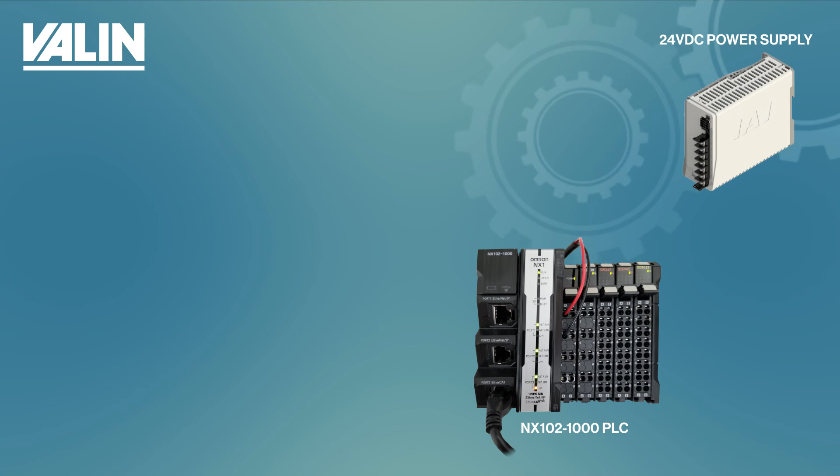Let's get started. So here's the hardware layout that we have. We have the NX102 here. We have the power supply to power up the NX102 PLC and also the MCON controller. And also here's the couple actuators.

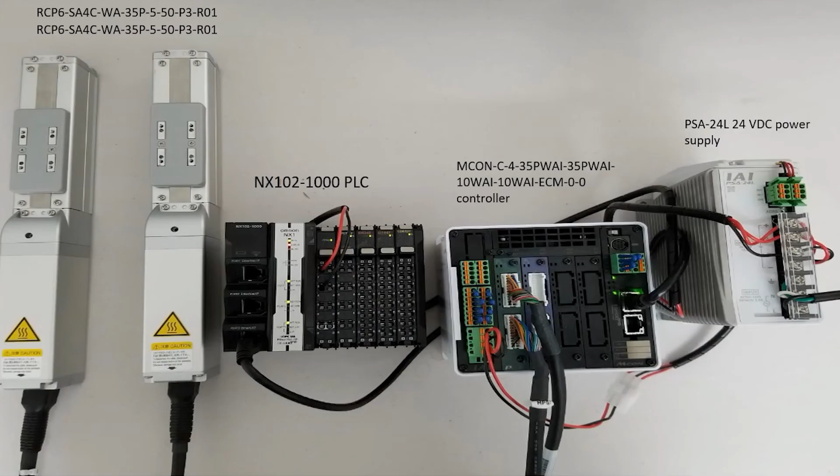So as you can see here, we have the computer connecting to the MCON controller to set up and configure the axis. And then from the computer, we also use the Sysmac Studio and connect it to the NX102 via Ethernet cable to program it. Here's another shot on how my layout is right now.

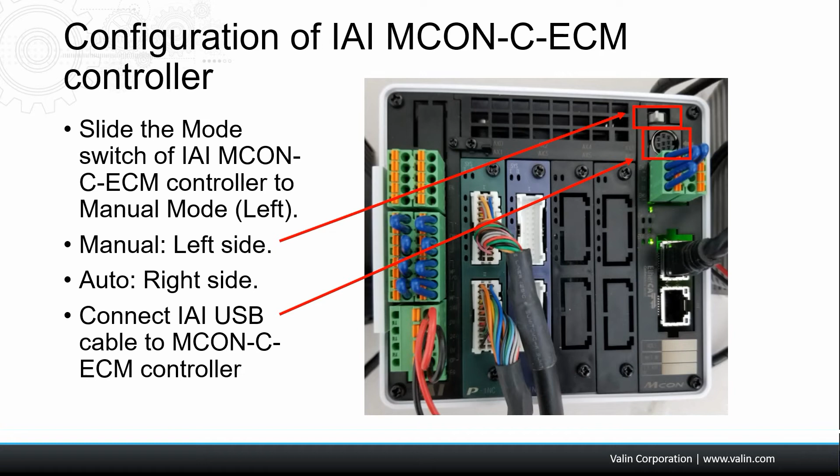All right, so first and foremost, we need to set up the IAI MCON EtherCAT controller first. So to do that, you want to make sure the mode switch is in manual mode, which is on the left side. And then you want to connect the IAI USB cable to the controller itself so you can do the configuration. Once you have everything connected and powered up, you want to launch the IAI parameter configuration tool.

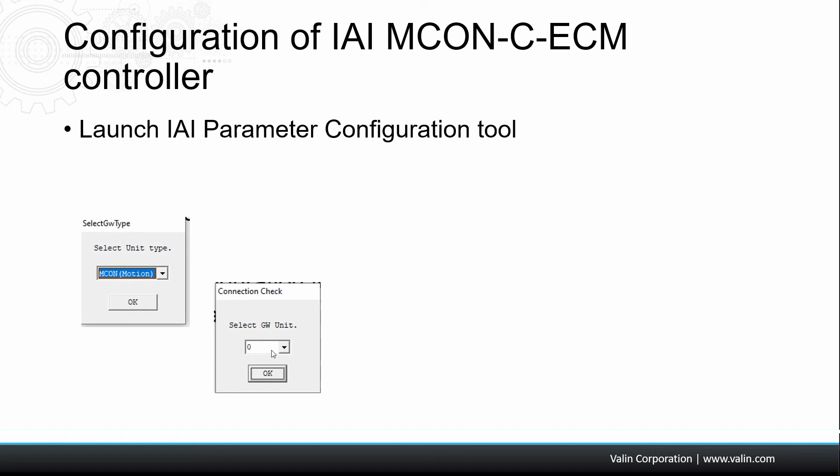Once you do that, a window will come up and you want to select the MCON motion and click OK. And then another window will come up and you want to select 0 and then click OK. Now, in case you couldn't get the communication to work, you want to click on port config and make sure the COM port is selected correctly and then the baud rate 115200 and then click OK.

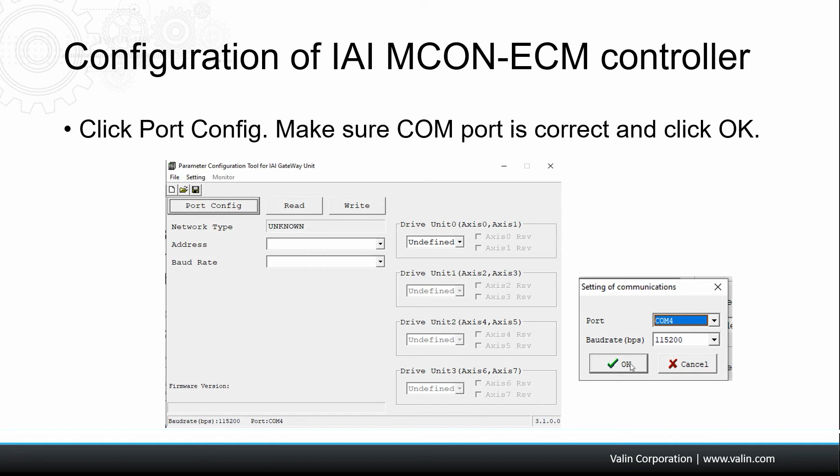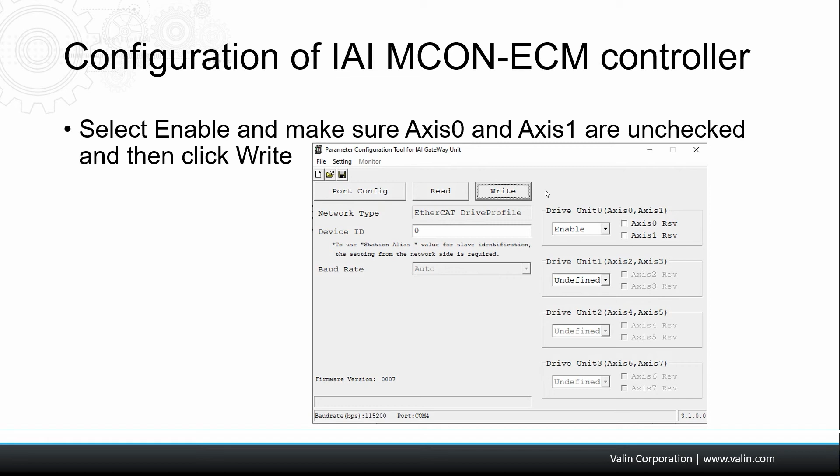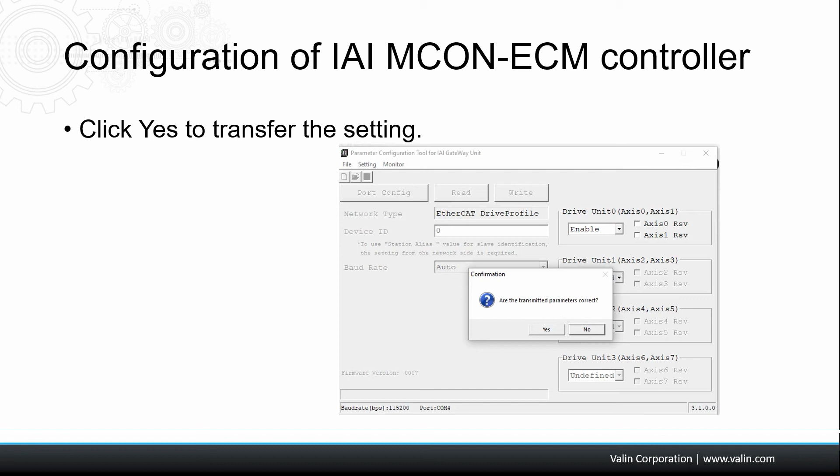Once you have everything connected, it should show EtherCAT drive profile 0. And what you want to do is to make sure that you select enable and also uncheck axis 0 and axis 1. And then click the write icon to transfer the setup that you have. And once the transfer process is going, you will see a couple of messages. And right now the window shows, are the transmit parameters correct? You want to click yes.

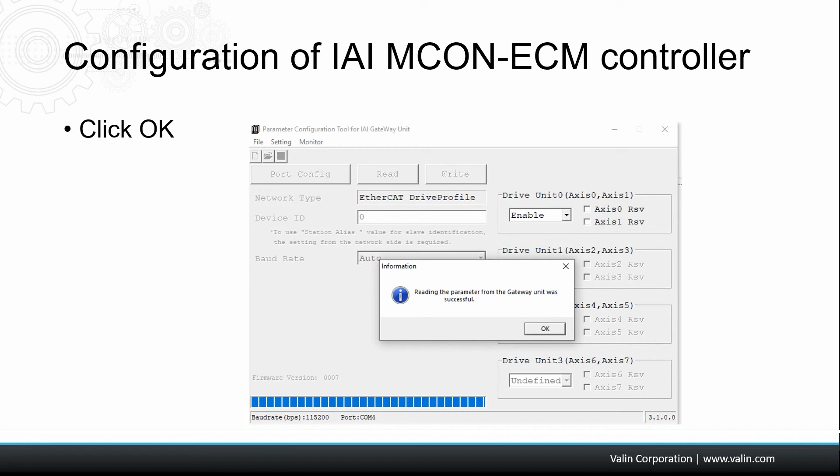And then another message comes up, transmitting the parameter to the gateway unit succeeded. Okay, so it's finished. And then you want to click OK here. And then another message saying we want to basically reactivate the gateway. You want to click yes. After it reactivated, another message comes up, reading the parameters from the gateway unit was successful. You want to click OK here. So what you just did is configure the gateway correctly to have 2 axes.

And then at this point, you want to close out the IAI parameter configuration tool and then launch the PC interface software for RC and EC cylinder. And once you do that, it will try to connect to the MCON. And as I mentioned, I have 4 axes in this setup, but I'm using only 2 axes. So we need to go back in and enable only 2 axes and disable the other 2 axes.

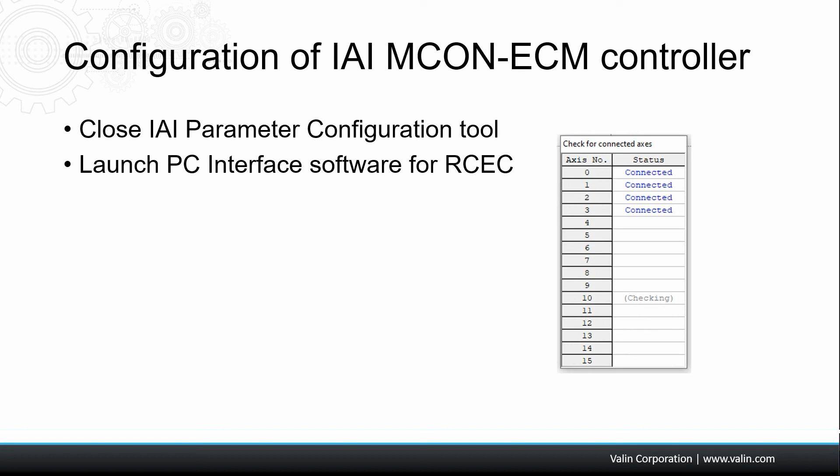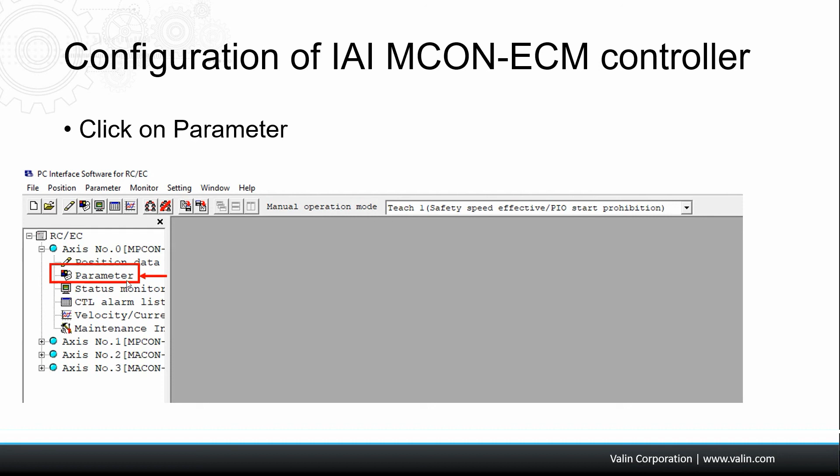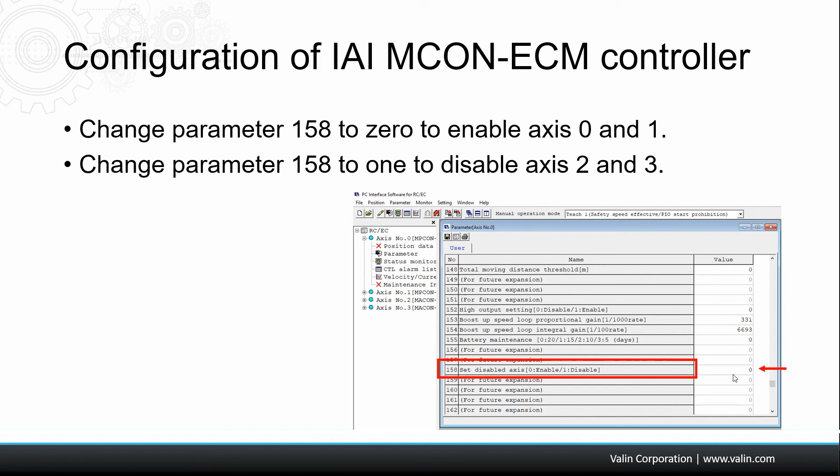Okay. So to enable and disable axes, you want to click on or select the parameter. Then you want to go to parameter number 158. And you want to make sure for axis 0 and 1, the parameter value should be 0. 0 means enable. So you do that for axis 0, axis 1, and you want to have 1 on axis 2 and axis 3. Once you finish that, you want to click on the controller icon. And that will basically transfer all the parameters that you just changed to the controller.

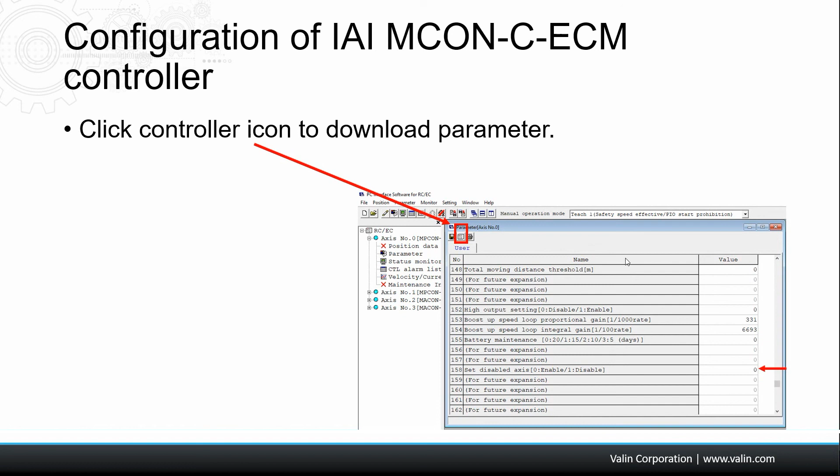This is how to set up an IAI MCON-C-ECM EtherCAT controller with an Omron SysMac machine automation controller NX102-1000 PLC. Thanks for watching and let us know if you have any questions.